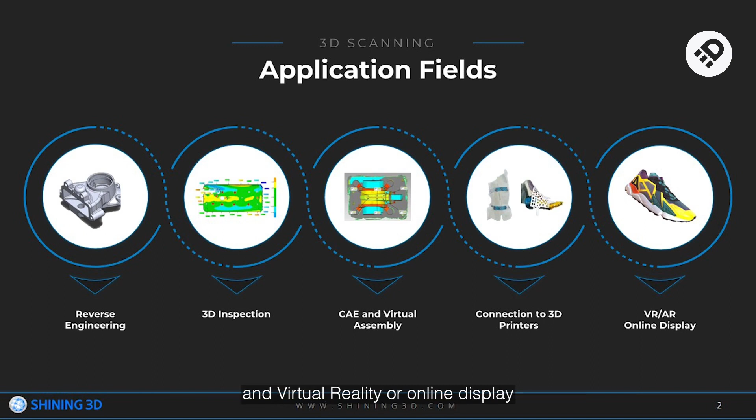3D scanning is a process of capturing the physical shape and appearance of real-world objects using a variety of technologies. In general, there are 5 applications of 3D scanning: reverse engineering, or 3D scan to CAD, or 3D modeling; 3D inspection, CAE, and virtual assembly; connection to 3D printer for 3D printing; and virtual reality, or online display. Reverse engineering and 3D inspection are the most popular applications.

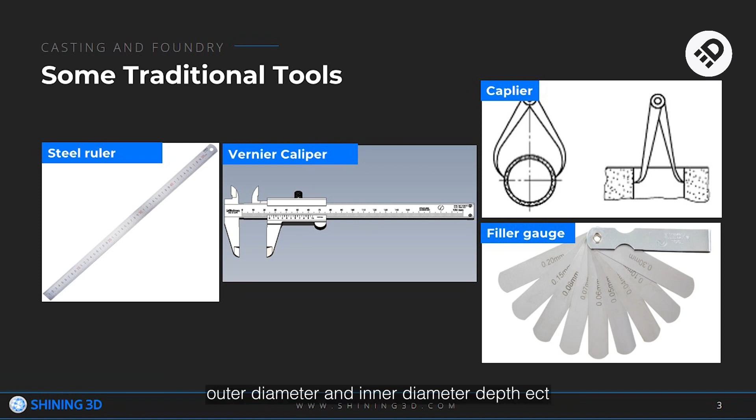Here are some tools used in traditional measurement in the industry: steel ruler and vernier caliper. It's a common measurement tool for measuring the length, outer diameter, inner diameter, depths, etc. Calipers. Those calipers are used to measure the outer diameter and inner diameter of thin mold or thin core, groove, radius, etc. Feeler gauge measures the thickness of the gap. Those tools are not very accurate, time consuming, and easily affected by operators.

CMM machines and scan arms are 3D measurement tools. Coordinate measuring machine advantages are highest accuracy and precision. Disadvantages are high investment and running cost, strict requirements on environments like humidity, temperature, and vibration, time consuming for full-scale measurements, and difficult to measure parts with confined and curved areas.

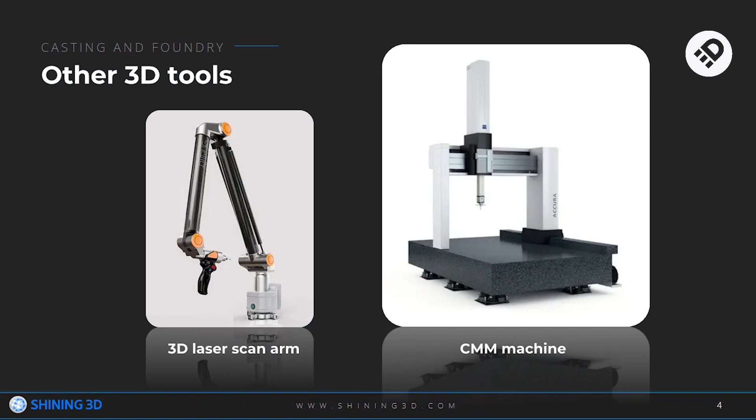Pros and cons of 3D laser scan arm. Pros: more portable than coordinate measuring machine, easy and quick to measure, high accuracy. Cons: high investment, scanning size restricted by arm size.

This is a short comparison among 3 measuring tools. Measuring volume: 3D scanner has less limitation on measuring volume. It can work with a photogrammetry system like DigiMetric to extend measuring volume and still keep high accuracy. CMM machine and 3D arm measuring volume depends on table size and arm size. Accuracy: CMM machine has highest accuracy, while 3D arm and 3D scanner achieve a similar level of accuracy.

CMM machine cannot measure soft or untouchable material, for example, a high temperature casting part. 3D arm, if equipped with a laser scanning module, and 3D scanner can scan soft and untouchable material. All 3D tools can do 2D measurement. CMM probe and arm probe capture points slowly. It's time-consuming to capture more points. 3D scanner with multiple laser lines or optical sensor captures millions of points per second.

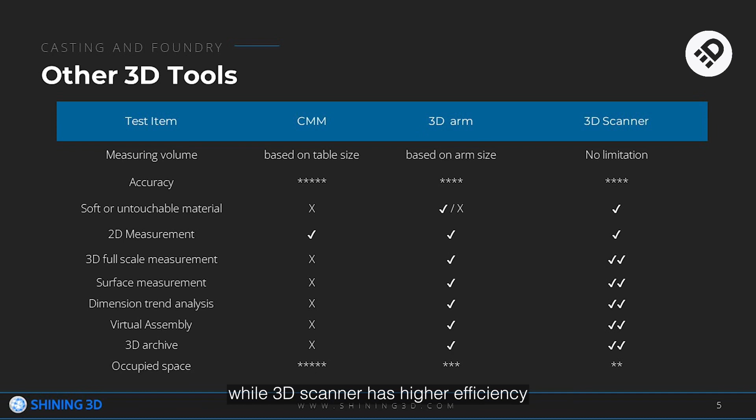Due to that, it's almost impossible for CMM machine and 3D arm probe to do full-scale measurements: surface measurement, dimension trend analysis, virtual assembly, and 3D archive. 3D scanner and 3D arm equipped with laser scanning module can do that, while 3D scanner has higher efficiency. 3D scanner occupies much less scanning space than CMM machine and 3D arm.

Benefits of 3D scanner: fast and accurate. As the laser moves across the surface of an object, thousands to tens of thousands of data points can be recorded per second, meaning your project can process faster. High accuracy. For example, Shining 3D FreeScan handheld blue laser 3D scanner, accuracy up to 0.02 mm or 20 micron. Good environmental adaptability.

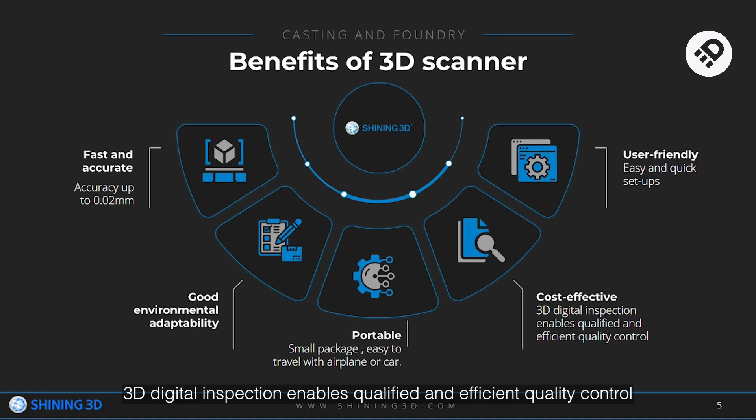Temperature, humidity, light, and vibration have little effect on scanning, and 3D scanner can be used widely in the workshop. CMM devices have very high environmental requirements, and the articulated arm must not vibrate. Portable, small package, easy to travel with by airplane or car. Cost-effective, 3D digital inspection enables qualified and efficient quality control. User-friendly, easy and quick setups to capture and measure full dimensions, regardless of confined areas and dead angles.

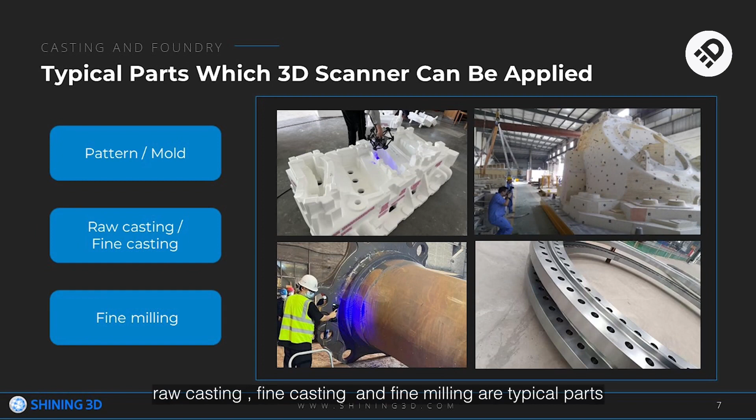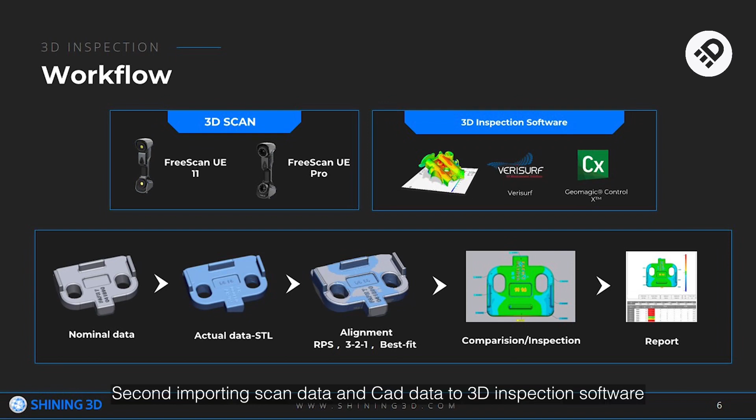Foam pattern, wooden pattern, metal mold, raw casting, fine casting, and fine milling are the typical parts often 3D scanned by 3D scanner for reverse engineering or 3D inspection applications. Typical workflow for 3D inspection of casting and foundry parts. First, scan parts with 3D scanners, get 3D data. Normally, it's STL format. Second, import scanning data and CAD data to 3D inspection software, like Geomagic Control X or Verisurf, and align.

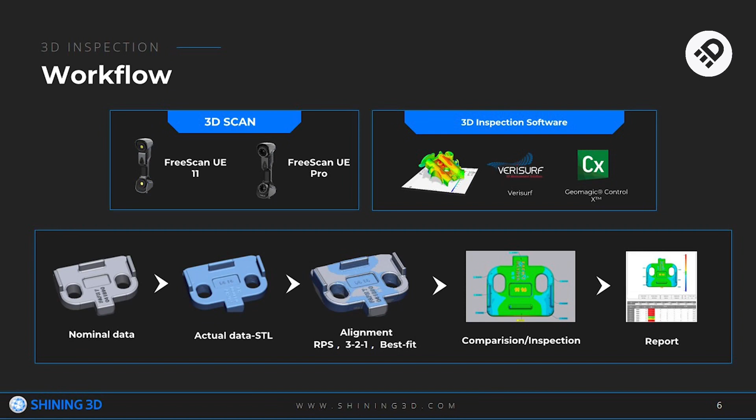There are several methods to do alignment. Popular methods are best fit alignment, RPS alignment, or 3-2-1 alignment. Third, create the deviation map or GD&T or other inspection items and export the inspection report. Let's watch a short video of the 3D inspection process.

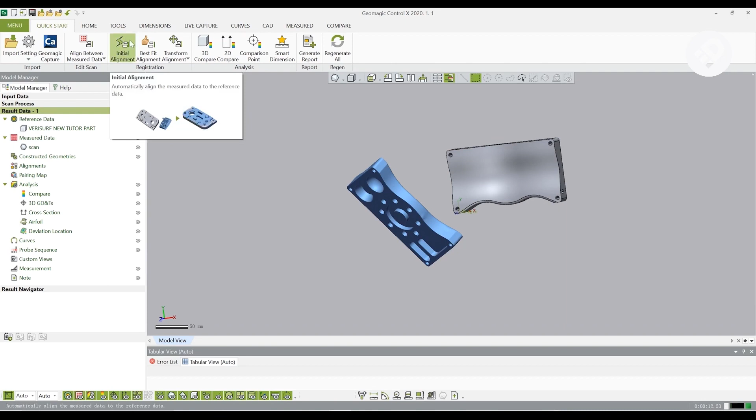After that, we will use Control X to compare the product data, which we just scanned, and the CAD file. Before we get started, import the CAD file and scan data to Control X. You can directly drag them or click Import and select the file. You will see the CAD file is in the reference data and the scan data is in the measured data. We start with initial alignment, apply with default parameter. Then click Best Fit Alignment, also using default parameter, and apply.

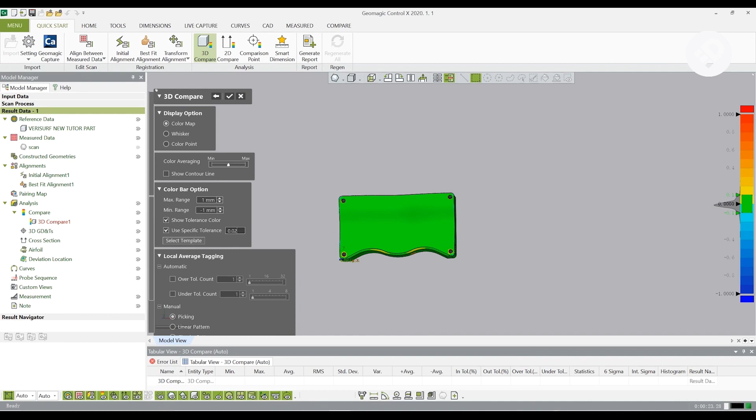Next, we can start the inspection using 3D Compare. Set the max deviation as an appropriate value and click Next Step to set your specific tolerance. Here we use 0.02 mm and click the check mark. The color map will show on the object and the annotation on the right. The darker the color, the greater the deviation between the scanned data and the CAD file. Since this object is not exactly the same as its CAD file, you will see some red areas with high deviation. If you want to know the exact deviation of a certain point, use the comparison point tool and click on the object. The deviation value will show.

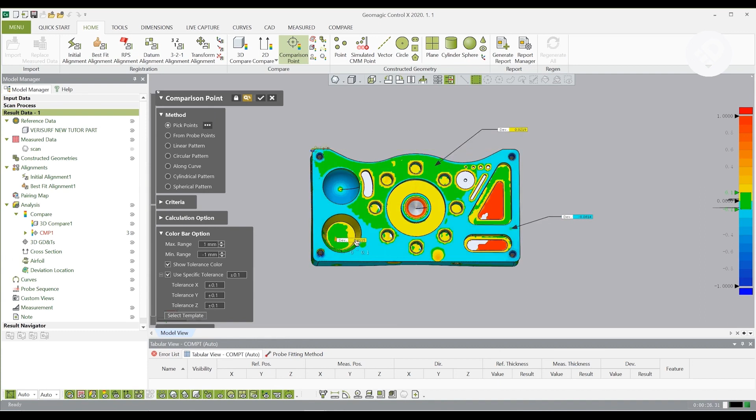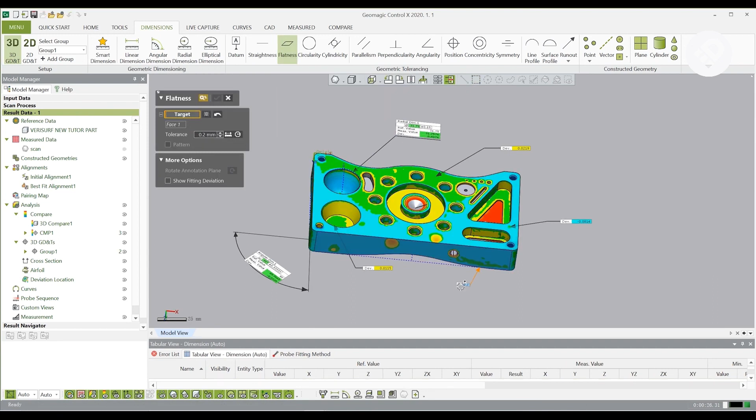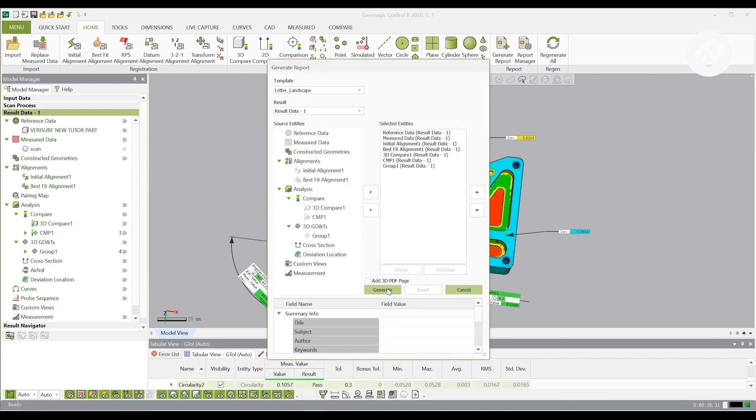Also, you can do some quick measuring with the dimension function. For example, simply choose 2 planes to measure the angle using angular dimension. And click on a circle or sphere to measure the radius by using radial dimension. Checking flatness and circularity is also really convenient, using the corresponding tool and clicking on a plane or circle. At last, Control X can generate an inspection report automatically by just clicking Generate Report.

Foam pattern is made of expanded polystyrene foam, which is created to coat a mold. The pattern is then vaporized or burned away when the melted metal is poured into the mold, leaving behind a precise metal casting. 3D first article inspection.

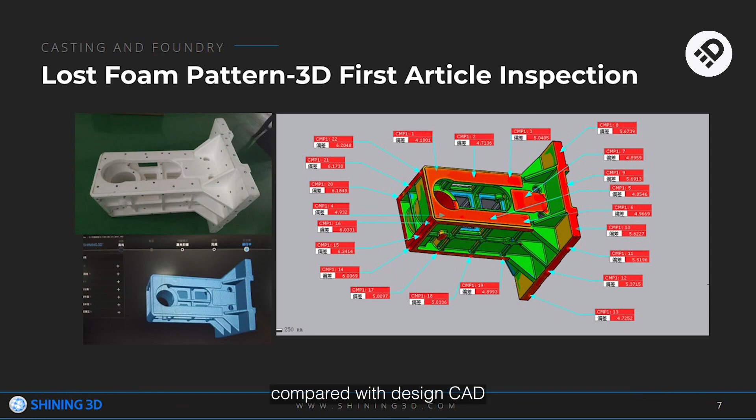Before casting, it's essential to measure the foam pattern's deviation, compared with the designed CAD. FreeScan UE series can easily scan and generate high accuracy and high detail 3D data in short time and on-site.

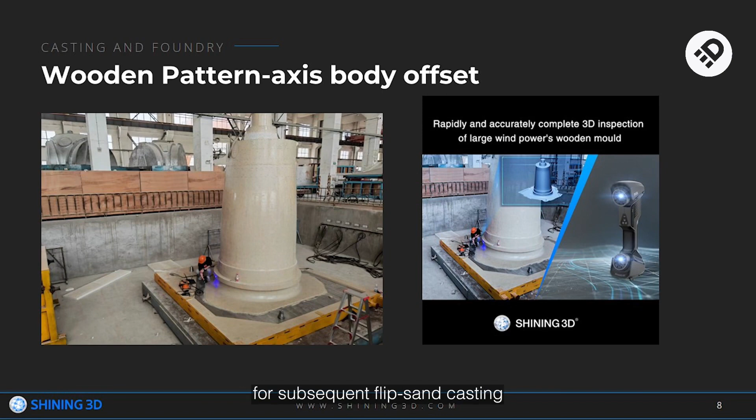Wooden patterns are widely used as prototypes for subsequent flip-sand casting. As a pre-production process in the production chain, its dimension and shape directly affect the quality of the final product. Due to the extra large size of this workpiece, the wooden pattern body is easily shifted during the production process.

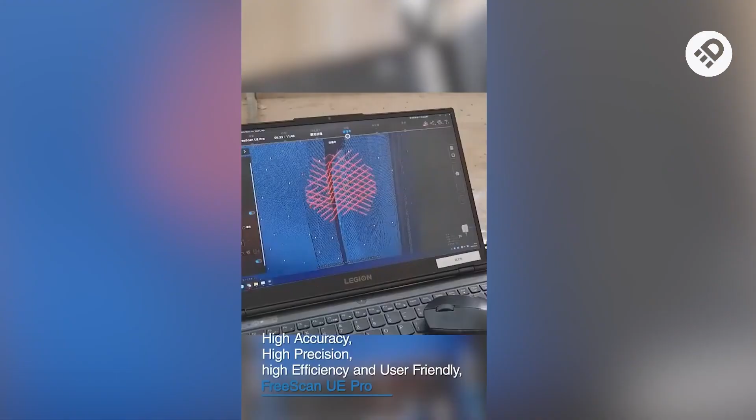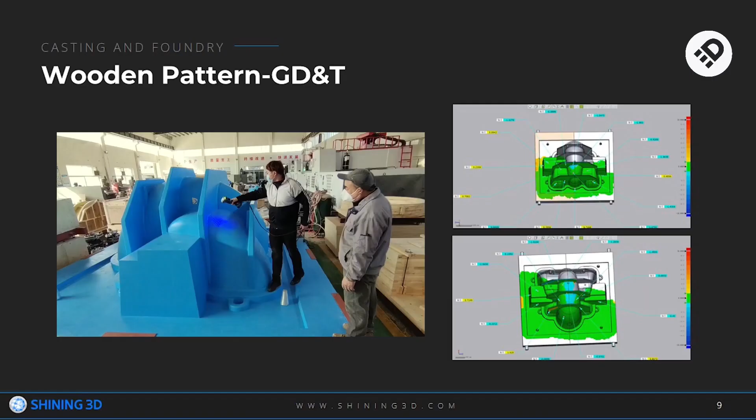It needs to be quickly inspected in full size by high-precision 3D scanning equipment like FreeScan UE Pro, which has built-in photogrammetry, to determine whether and to what extent it is offset. Here is another wooden pattern case. Customer requests supplier to create a 3D report, which includes color map and GD&T, like flatness, key dimension deviation.

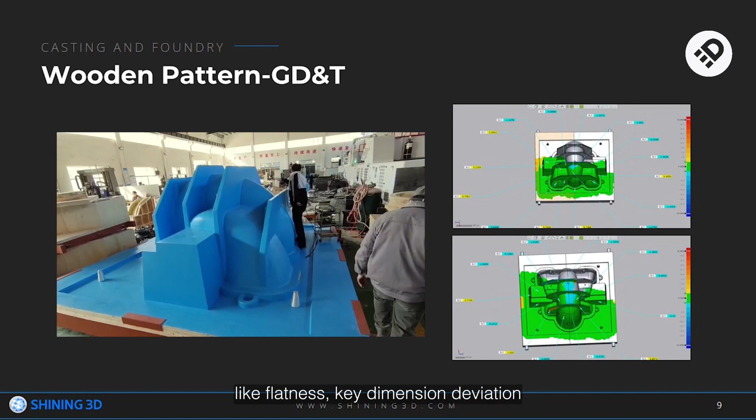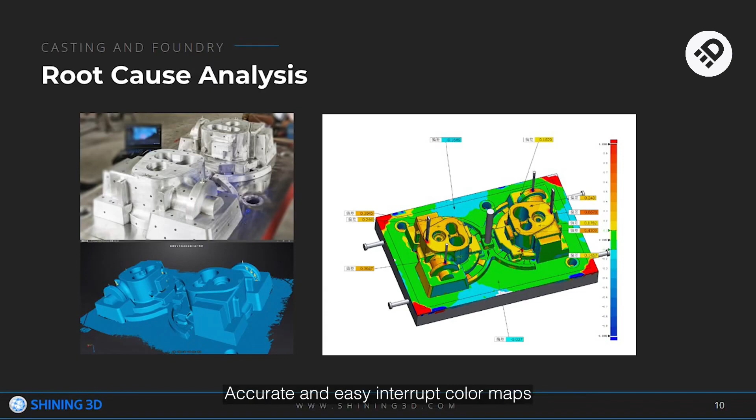Root cause analysis. When final goods are not qualified, we need to find the root causes. 3D scanner helps to find issues by inspecting parts and tooling in each stage of manufacturing process. Accurate and easy to interpret color maps support the corrective action plan.

CNC programming verification. This custom mold is made by a CNC milling machine. After 3D scanning and comparing to the designed CAD, it's easy to find areas overcut or undercut, as well as reference hole position deviation. Virtual assembly.

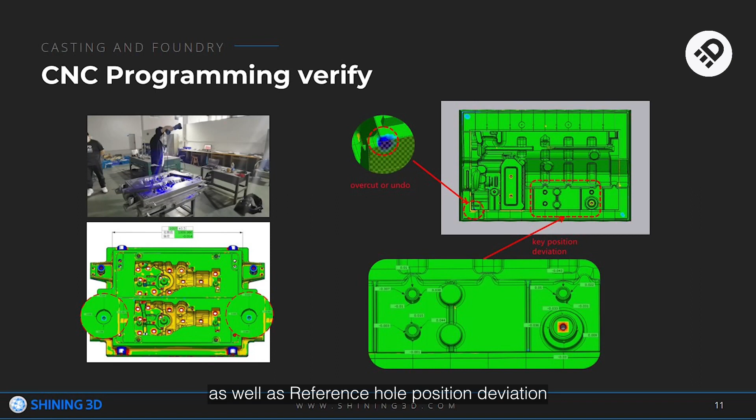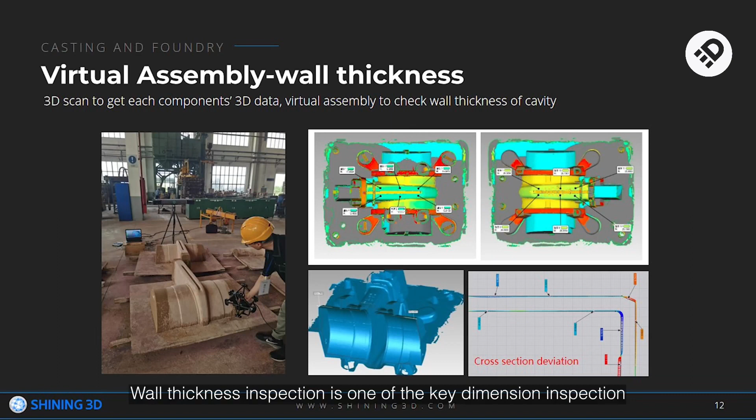Wall thickness refers to the thickness of a casting wall component composed of the mold and core, core and core. Wall thickness inspection is one of the key dimension inspections. By scanning upper parts and lower parts of the pattern, virtual assembly is available in 3D inspection software. Wall thickness of the cavity can then be measured before casting.

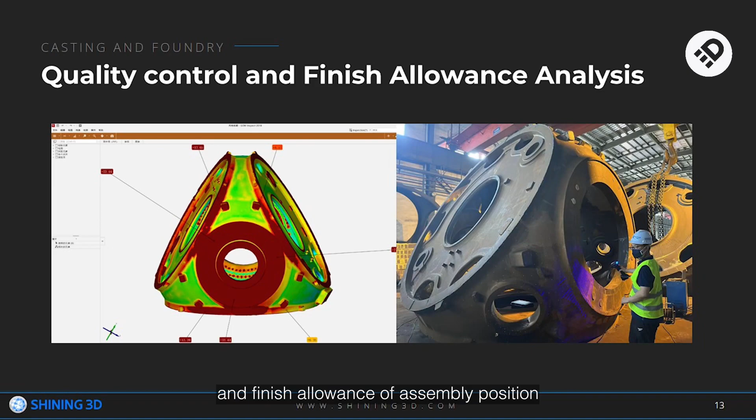Like this extremely huge wind turbine hub, it's important to control the dimension deviation and finish allowance of assembly position. FreeScan UE Pro has built-in photogrammetry working with the scale bars, very suitable to scan those huge objects and analyze them.

The anchor mouth is generally made of steel or cast steel, and the core requirement in the manufacturing and installation process is not to jam the anchor. To achieve no anchor jamming, it's necessary to ensure that the physical object is consistent with the design structure during the manufacturing process of the anchor lip, especially the curvature of some curved surfaces.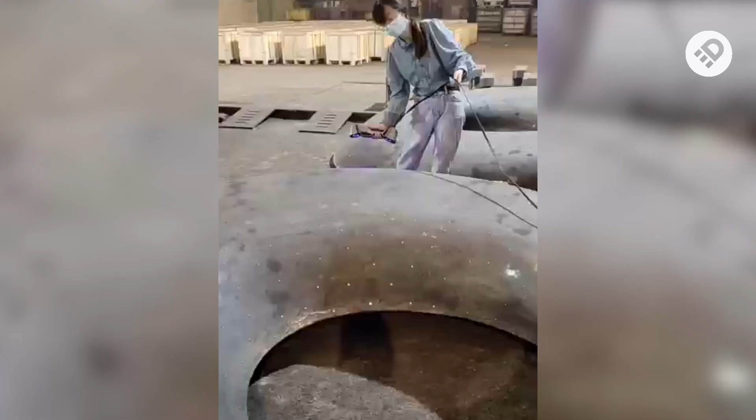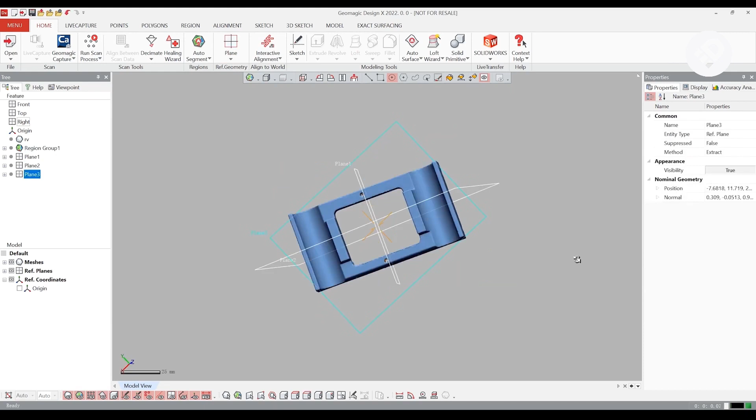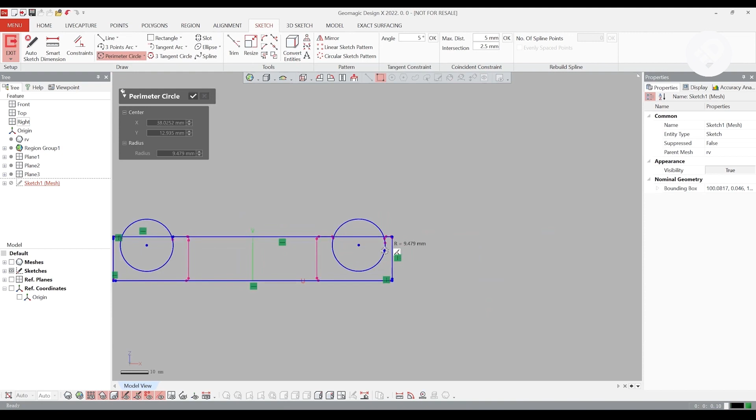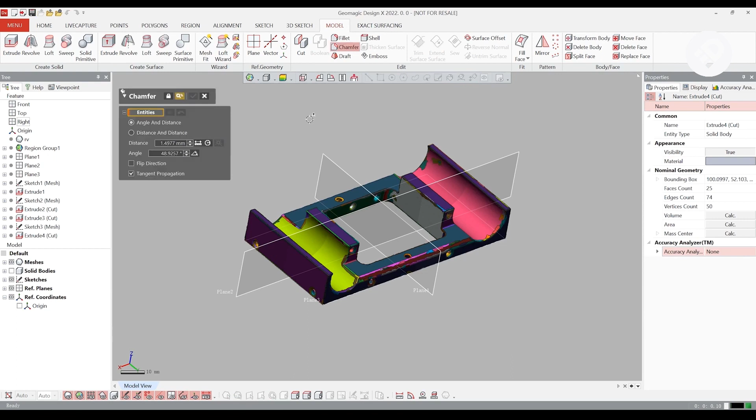Maintenance and redesign. 3D scanners can scan components and generate an accurate 3D digital file, which can be used for reverse engineering or optimized jigs and fixture design. The following video shows the general workflow of reverse engineering. 3D digital archive for future maintenance.

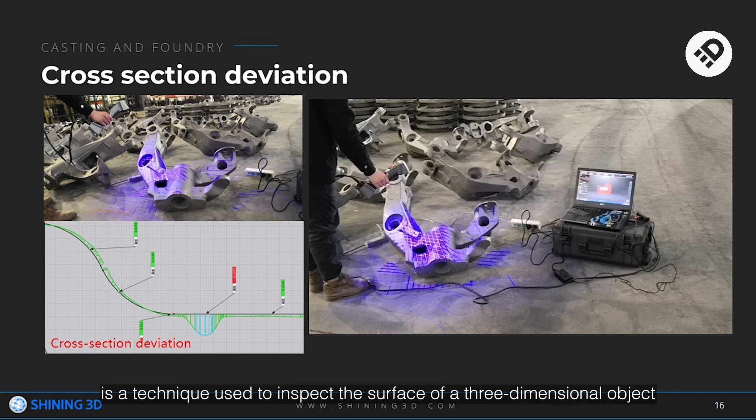3D cross-section inspection is a technique used to inspect the surface of a three-dimensional object. FreeScan series can easily capture objects' 3D surface. In inspection software, we can slice and create crosslines. Compared with the designed crosslines, it's easy and quick to find deviations.

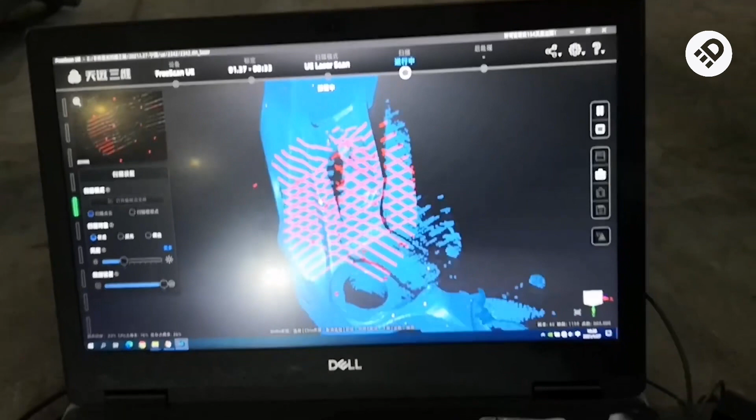Perpendicularity refers to the degree of being perpendicular, which means that two lines or surfaces meet or intersect at the right angle, 90 degrees to each other. In other words, when two lines or surfaces are perpendicular, they are at 90 degrees to each other and form a right angle. Concentricity and coaxiality in the ISO standard is a tolerance that controls the center-derived median points of the reference feature to the datum axis.

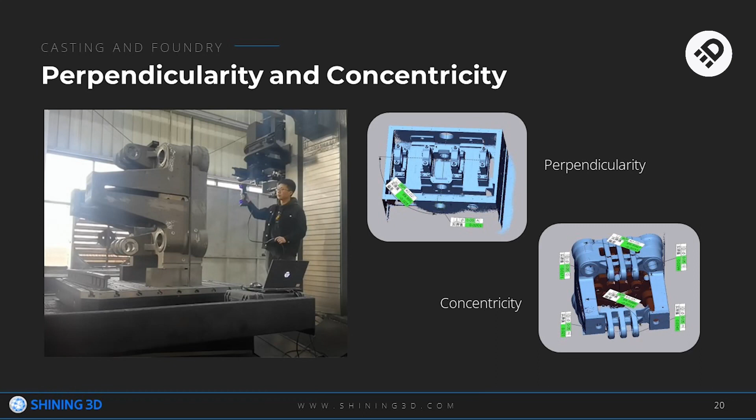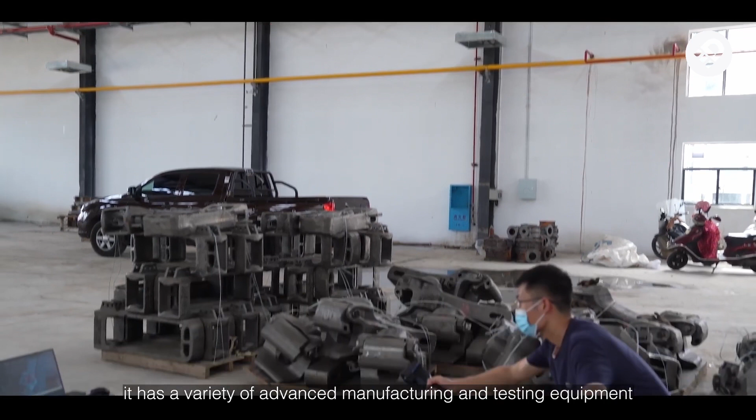Zhuzhou Goldfront Foundry Corporation Limited is a production base of railway electric locomotive casting parts in China. As a professional supplier of castings for world-class railway transportation equipment, it has a variety of advanced manufacturing and testing equipment. To accurately control the dimension of the castings, Goldfront Foundry has introduced the Shining 3D FreeScan UE Pro.

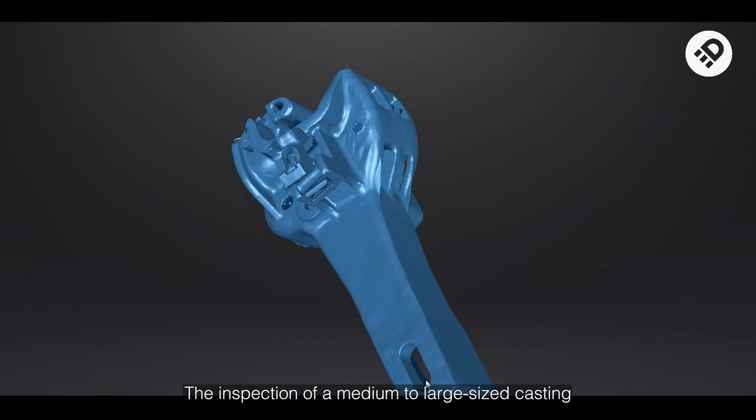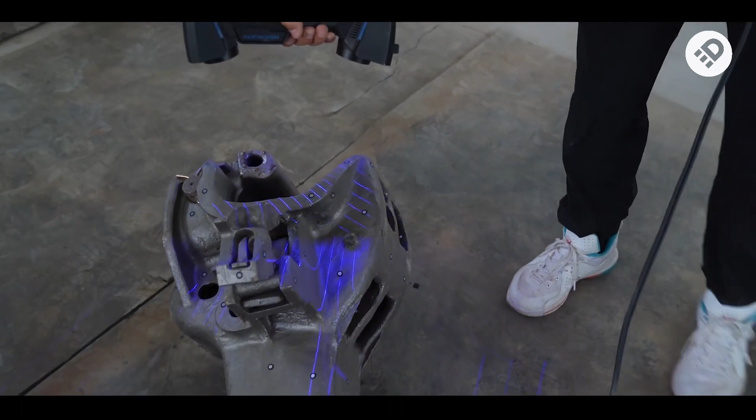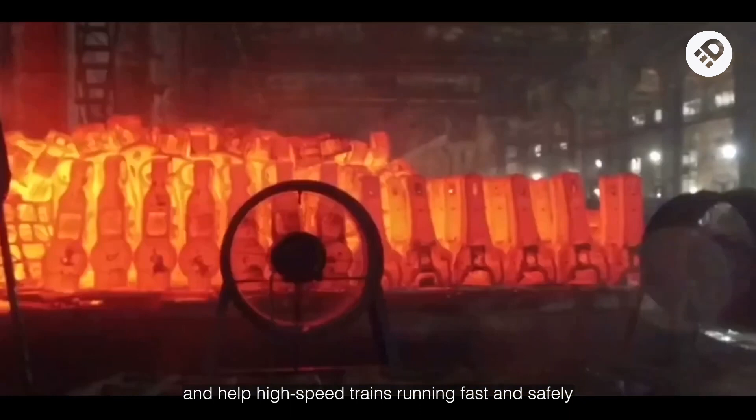With the help of FreeScan UE Pro, the casting inspection workflow has been greatly accelerated. The inspection of medium to large size castings once required 1 or 2 days of a master technician, but now it only takes half to 1 hour. At the same time, the accuracy of dimension inspection is also greatly improved, which ensures the casting meets the design requirements and helps high-speed trains run fast and safely.

In the process of geological exploration and mineral extraction, the polycrystalline diamond compact drill is an essential tool. Its dedicated design structure and hardness make it able to bite the underground rock layer and obtain valuable underground resources. In this case, a PDC oil drill will be scanned and 3D inspected.

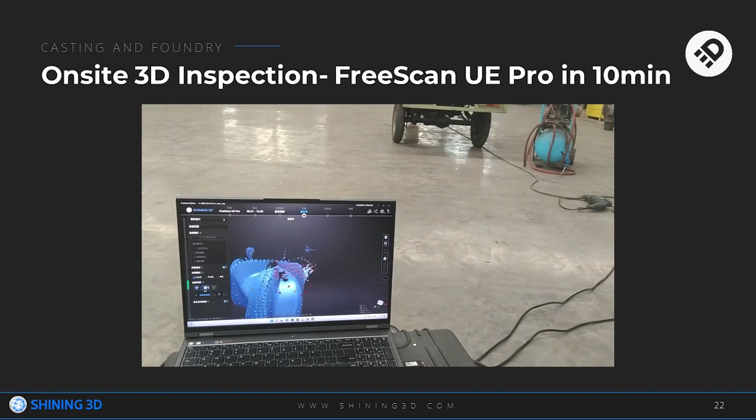The PDC oil drill comes from a domestic oil equipment manufacturing company with over 26 years of history. Due to the irregular shape, it's difficult to obtain complete and accurate data quickly by using a CMM machine and other tools. Key inspection items: the machining allowance of the casting drill body and blade wing, the angle between the height position and the dimension of the diamond composite sheet, and the horizontal plane.

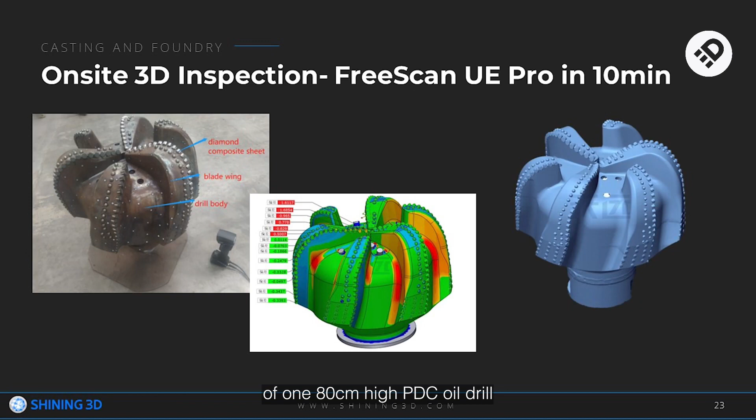With the Shining 3D scanner, the benefit is inspection time from 1 day to 10 minutes. Previously, using a CMM machine, one drill may take 1 day, while a 3D scanner takes about 10 minutes to complete the 3D inspection of one 80 cm high PDC oil drill.

Expand the 3D inspection range. Before using 3D scanning technology, there were only a few measurable parameters recorded. Nowadays, with high-precision 3D scanning, it's possible to obtain the relationship between the positions of diamond composite sheets in space and more accurately measure parameters that directly affect the efficiency of the drill, such as the height position of the diamond composite sheet and the angle to the horizontal plane.

That's all for today's presentation. Let's move to the Q&A section.